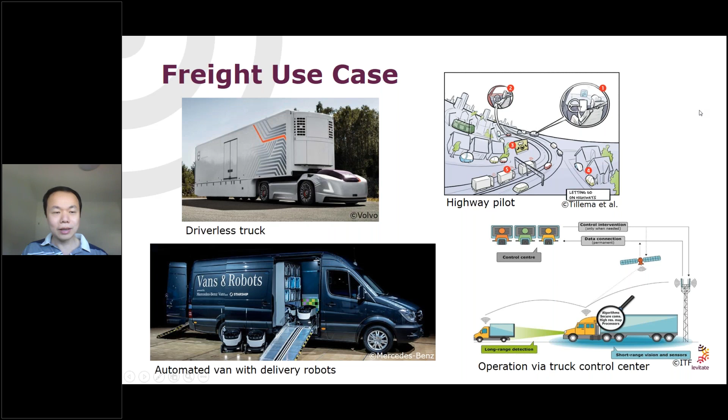Talking about the freight use case in connection with automated vehicles, we can think about lots of technologies. For example, driverless trucks for the container transport, automated vans with robots for delivery. Then we have all kinds of automated pilots for the highway. We can use control centers to control trucks in case of emergency. If there is no emergency, then the truck could drive on the highway. All these technologies are not so much the focus of this project, but we are thinking about how those AV technologies can bring conceptual changes.

So the real question is, will the freight transport system change with the introduction of these new technologies? And less about what kind of new technologies will arise, and we will also not develop any hardware technologies in this project. And what are the impacts when we change the transport system we know today?

And our assessment methods for these impacts are mainly coming from 2 directions. On the one hand, we have operations research, which involves optimization methodologies for, let's say, macro level planning from the viewpoint of freight operators. Because freight transport is plannable, those freight operators will mainly have their focus on the economic gains, and the concepts should be economically viable. And then we have micro simulations to assess the traffic impacts.

The first application we looked into in this freight work package was the automated urban parcel delivery. And we compared between several possibilities. The first one, just for reference, is the manual delivery, where we have a driver, and this driver usually also brings the parcels to the users. And then we have semi-automation as a possible scenario, where the delivery van is a connected automated vehicle, but we still have some personnel who does the delivery task. The reason is some obstacle for automated delivery is the infrastructure, namely where to place the parcels or how to hand over the parcels to the people.

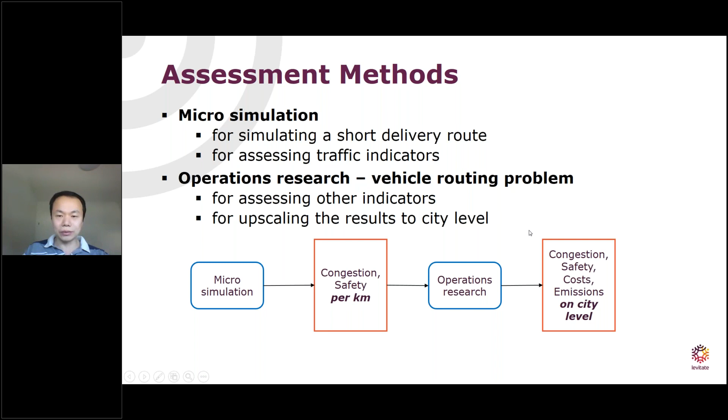For the micro simulation, we are working with the Aimsun Next tool, which is a traffic micro simulation where we model the vehicles and the streets and also the background traffic. For Vienna, we took

some examples of areas. Here we see an example of a rural area where we have a delivery route of 3 kilometers. And then we have a repeated parking and driving model for the delivery task, where we say that the delivery van is halting every 100 meters or so. And then we measure the congestion or delay caused to the background traffic and also measure the number of conflicts.

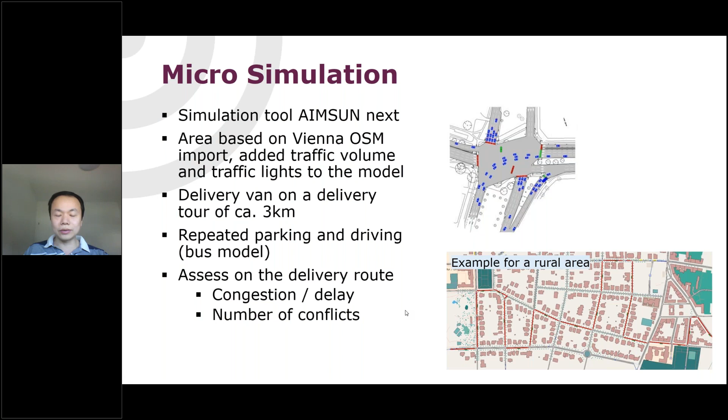The results of the micro simulation, to sum up, were that for the congestion, the difference between the manual van and the automated van is not so great on the background traffic because there is only one vehicle involved, and in the background traffic we have many other vehicles. And the fully automated delivery during night causes nearly no delays because there are no other cars or very few cars otherwise on the streets.

And for the safety, we also have no significant difference between the manual van and the automated van. This is also only with respect to the background traffic. Of course, there are some minor differences if the vehicle has to park into some parking lot and exits the parking lot, but the overall impact on the background traffic is quite minimal.

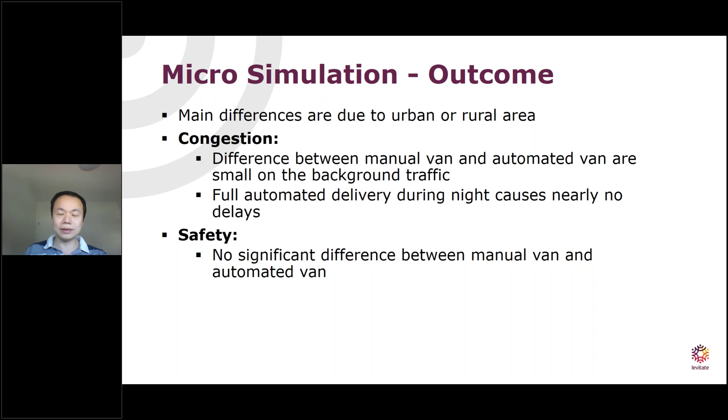Then talking about operations research, we are basically using VRPs, or vehicle routing problems. We took the map of Vienna and some data we got from the freight operators. We have two distribution centers, one in the northeast and one in the south, and they service different districts. And as an example, for the 6th district, which is quite

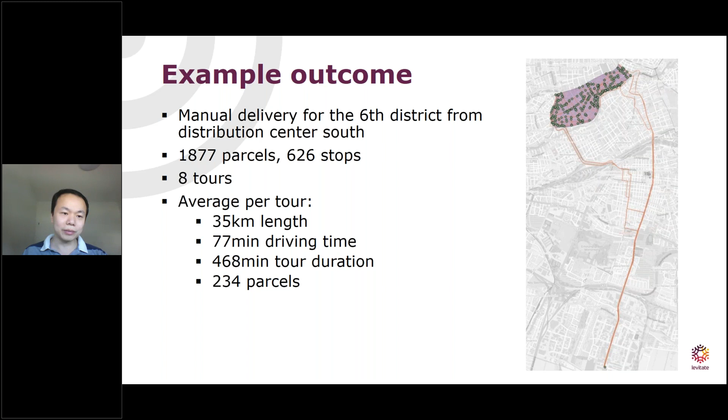urban, we just model the tours required from the distribution center towards the area of delivery, and then the delivery route consists of 8 tours or 8 vehicles, and we can obtain the average length, which is 35 kilometers. We can obtain the driving time and also the parcels delivered to this area. And with this methodology, we can see a full picture of Vienna, where we do individual planning for each of the districts and then sum up all the results.

For the fleet size, we see that the manual delivery, or the status quo, requires some 470 vehicles and staff personnel, of course. And by applying semi-automated delivery, we can reduce the number of vehicles due to the capacity increase, because we can do more deliveries in the same shift of 8 hours. And for the fully automated delivery, we also require a very similar number of vehicles. On the one hand, we can do 3 shifts per day because we can operate during night. But on the other hand, we assume that the parcel capacity of each vehicle will decrease.

And then for the total kilometers driven, we can see that actually for the fully automated delivery scenario, we are increasing the mileage because we do 3 shifts, and therefore we are increasing the kilometers driven to 242%.

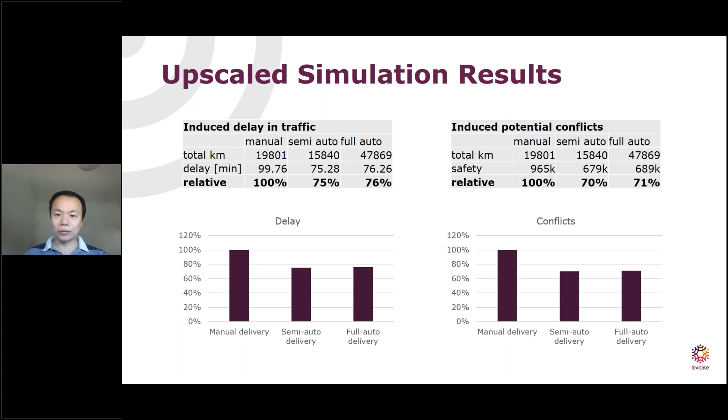To conclude, under our assumptions, where we took them from available data and some others from just reasonable thinking, we can say that automation in freight delivery can decrease the operation cost significantly, because the most expensive part is still delivery personnel or the drivers. And then, of course, the major change comes with delivery towards night shifts, because during the night, people don't want to work in the current system. But if we are applying automated delivery, then there is no argument against using the delivery during night, where the traffic load is actually lowest.

And then some future use cases in freight we are addressing is, for example, automated delivery via white label city hubs. I think this is very relevant for the cities. They want to consolidate the freight transport or the parcel delivery, and how can automation help with this respect? And also the highway platooning is a very mature application already.

But for example, what will it change when we are thinking about the bridge infrastructure? For example, on urban highways, we have many bridges, but highway platooning means that we have more vehicles per kilometer, and this will cause more weight on the bridges. So do we have to react to this, for example? So these are just two examples of how we will proceed within the Levitate project in the freight work package.

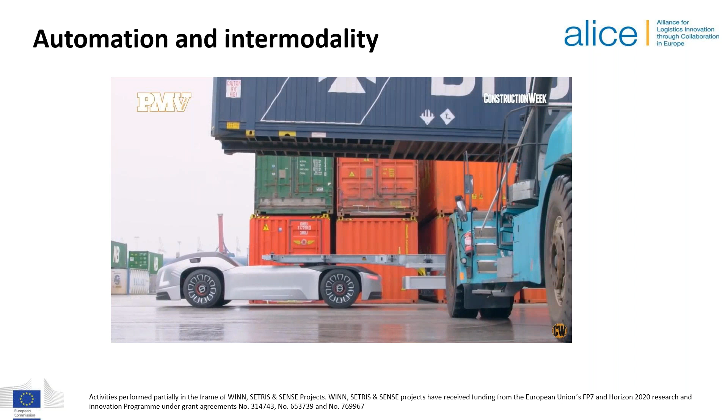The second case is how automation can help intermodality. Here we see, and it was in one of the pictures before, this project, it's Volvo Vera. And the interesting thing is that one of the problems preventing intermodality is the high cost of the last mile between the terminals and the warehouses and the customers. In particular, this could happen in big logistics hubs where there are terminals, could be ports, could be inland terminals. So the different containers could be transported in an automated way to the final destination in the warehouses. Normally, in many places, these are semi-confined areas.

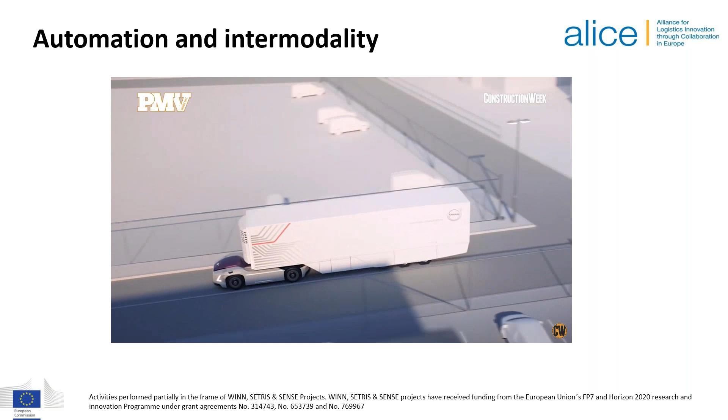There are larger logistics platforms, like, for example, in Zaragoza, where I live, where many companies have their warehouses. So this could be a potential vision or future, that there are fleets of automated vehicles that could automatically drive the containers from the terminals to the warehouses.

Then a future, and this was already mentioned, but here what I want to say is that this is not that far away. Valeo already delivered and unveiled a fleet of electric automated vehicles to deliver e-commerce in China. And this is very interesting, because it's not only automated, but it's electric. And this combination makes them a good fit for us to reach our target of going zero emissions.

And in particular, as has been said before, these systems are for the moment more expensive, but on the other hand, if we think of different ways of operating them, we can also save some money, as people are needed not in the whole process, but only in part of the process.

It's also important how automation can help with energy consumption. Now in long haul, freight transport speed is really defined by the truck driver resting hours. This means that most of the time trucks need to go at full speed, so they minimize the time in transport. But when this limitation is no longer in place, we could envision other scenarios in which the trucks go at a lower speed.

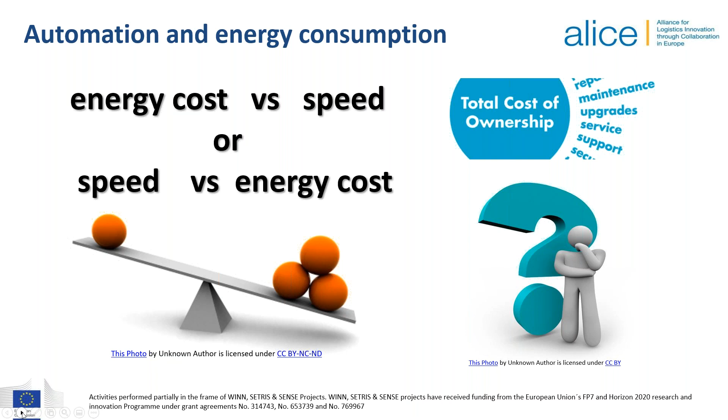Then one important thing is that currently in many countries, in particular in Germany, but also the UK and others, there is a lot of concern because of the driver shortage, and most of the drivers in our European countries are over 50, which means that in 10-15 years we are going to have a bigger shortage.

It's also important to say here that it's now very difficult to convince young people to be long-haul truck drivers, because if we are talking about automation, we are asking them to start a career in an area that may not stay here for their full career. So this is also an interesting problem to tackle.

And just to finish, there's also how automation can help us in these kinds of conditions. For example, at the start of the crisis we had a lot of problems with truck drivers not willing to enter Italy, or now Spain, because of the coronavirus situation. And even those entering the country were afraid that they could not come back. So this is a potential case.

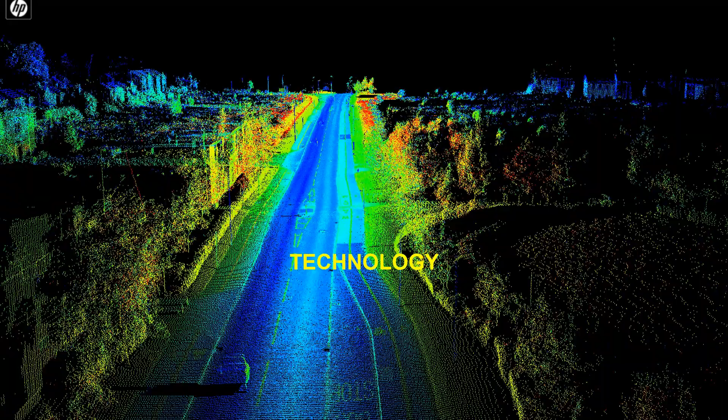Important to note is that when we set out on this project, we were not fully aware of the state of the art of the technology already available in the market, mainly for passenger transport. But as you will see, this is basically how LiDAR technology works on a vehicle. So it's heat mapping. We worked in our project with EasyMile, but it could just as easily have been Navya, who are basically the 2 leaders in Europe right now where it concerns autonomous passenger transport.

And you have a view here on the technology used. You have the localization using data fusion, where it uses lasers, cameras, GPS, odometry, and the IMU, basically the inertial measurement unit, sensor technology on where it is and how it moves in comparison to its environment. And then you have the decision-making safety chain. This split of technology will later come back in how we got this approved for demonstration. The decision-making safety chain mainly focuses on possible emergency stop, detection of obstacles, braking systems, etc. So really safety.

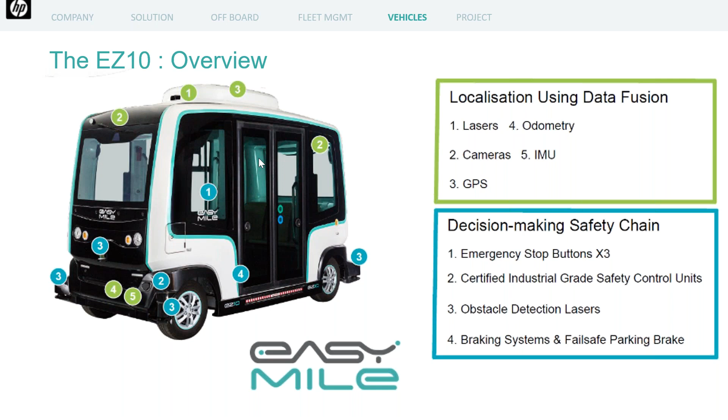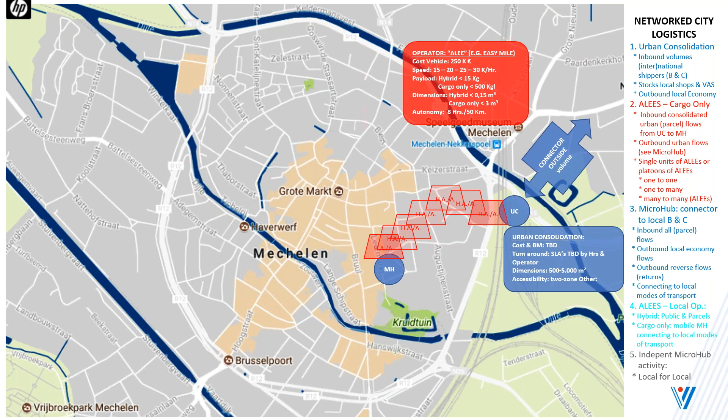that is purposely built that brings volumes to the microhub, and then you could have a local distribution that either is done by an autonomous vehicle in combination with passenger transport or dedicated, but also very important, it could link into local last yard solutions, be it by Stint, Starship, crowd logistics, bike logistics, cargo bikes, whatever. So that's basically the idea, and then you would come back to the need for that high-level architecture. So I think it's time to discuss what is next.

Perhaps some of you know that the OEMs, and that was also really interesting in Fernando's presentation, the cross-reference to Volvo for heavier duty transport. What is really interesting is that Volvo is probably the only OEM that currently has set up a service company to perform that service. And if you look at parcel delivery, we have two examples here. You have these OEMs, Renault with its EZ Pro, and especially Mercedes with its Urbanetic concept. And I would invite anyone that's interested to look up the Urbanetic concept on YouTube.

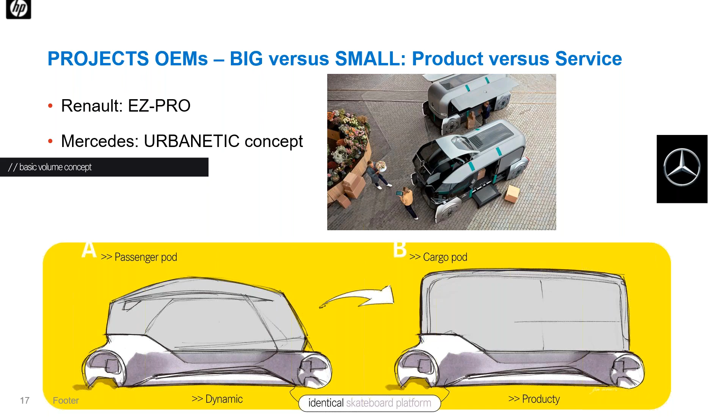There's many interesting videos. What you see is that the ideas and the concepts are there, but for instance, Mercedes is not pursuing right now this amazing concept because probably it just blocks their selling of vans. So it's still a long way to go. So that's why we believe at VIL that it's really important to continue experimenting, continue engaging in projects to really explore how these vehicles can be implemented.

We are doing that in a Horizon 2020 project that will start later this year, where we'll really experiment how such a vehicle can click into other solutions. We see in the market, for instance, in Belgium under Labbox, that spin-offs of car importers are setting up services. And it's also interesting to know that the city of Mechelen has really incorporated autonomous vehicles in its policy. So they are also looking into how these autonomous vehicles for passenger transport could also be a solution for parcel distribution. So that from my side is a short introduction to these projects.